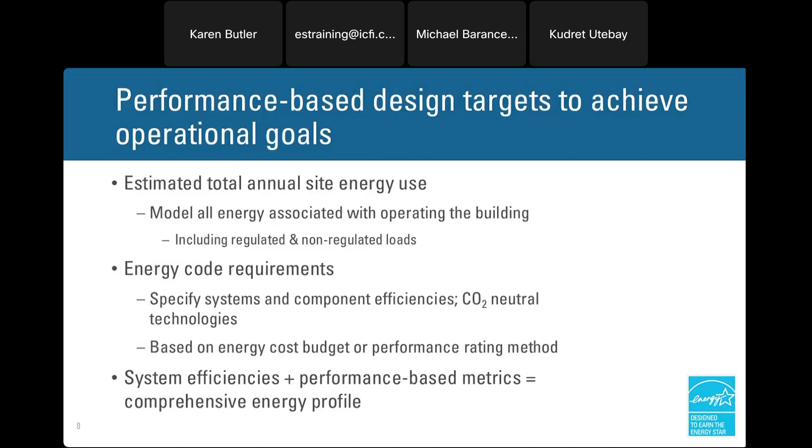So with Energy Star, we look at whole building energy performance relative to the US sample set of peer buildings. Most of you are very familiar with that for existing buildings. Well, guess what? Those same numbers available for existing buildings are also available for you to use as design targets. Then, of course, you have your ASHRAE 90.1 or whatever code compliance system you're using, looking at your system efficiencies, and in some cases performance rating method. However, everything associated with operating the building needs to be considered when running your model so that you can get a whole building energy use target. Next.

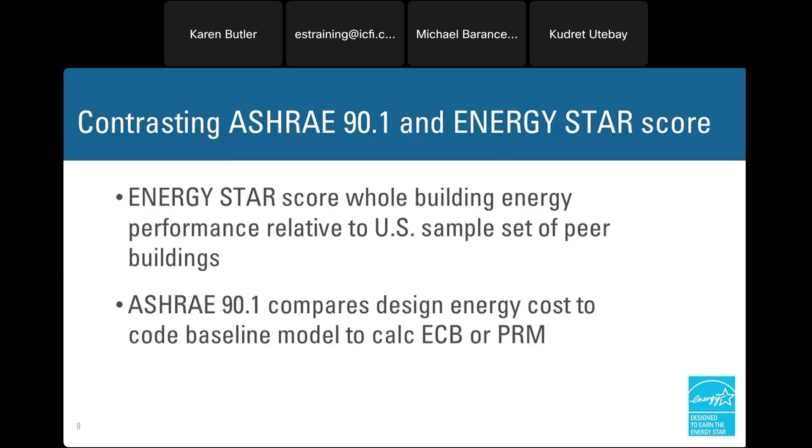And with that said, I get asked all the time, if I do 30% better than code, what is that in terms of Energy Star? Well, it depends. It may be an 80, it may be a 75, it might be 100. It depends on the strategies chosen for the project and the trade-offs you make to get the building to a certain efficiency. That's why having a whole building energy target is helpful, because now you're looking at not only the systems and system efficiency, but also performance metrics. Next.

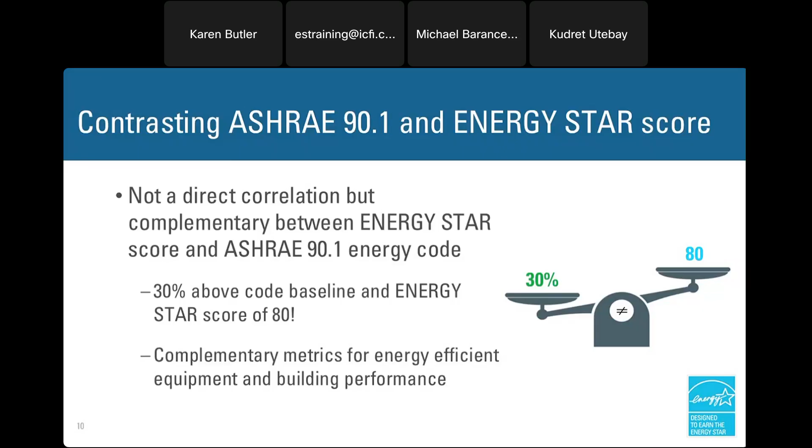Now, next slide. We are going to talk about this a little bit more. I'm going to give you more detail about how we have looked at that with Energy Star. And actually, there's another slide. I should probably have put that next.

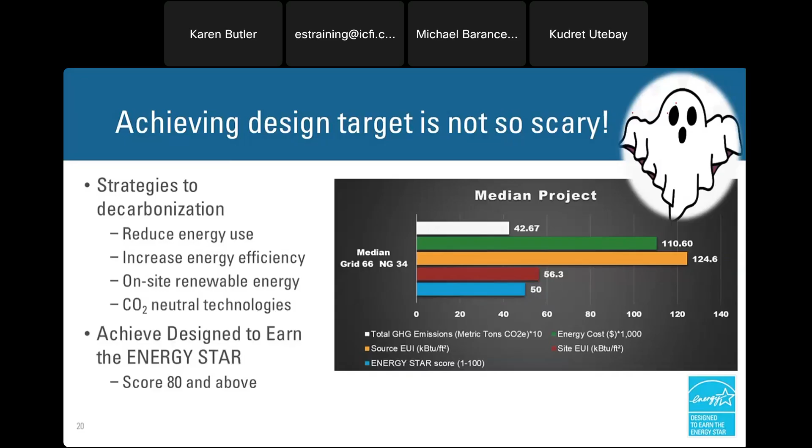So achieving your design target is not so scary. Strategies to decarbonize your projects: reduce energy use, increase efficiency, on-site renewable CO2 neutral technologies, and then achieve Designed to Earn the Energy Star, which is our monicker for design projects that meet the Energy Star criteria, scoring 80 and above.

So this I'm going to go through kind of quickly, and you can read through it when you get your slides. The bottom one is the median project, using median, which is a 50 on the Energy Star score. The second one is a project designed by an A&E firm to meet a certain goal, to achieve one Energy Star score, and two for their client's request. So we're going to look at the one that says grid is 68% and natural gas 32%.

That's my base project. So looking at this project, you can see how you can compare the various trade-offs during design. The lowest EUI is achieved with increased energy efficiency, and then adding on-site renewable energy can help you increase your Energy Star score and decrease your emissions. I encourage you to play around with the tools to take a look at the various strategies you're using.

So this one is 100% grid electricity and 21% energy reduction. In other words, I ramped up the energy efficiency in the building. If you'll notice, a couple things change. The EUI from the grid 68, natural gas 32 was reduced as a result of increasing my efficiency by 21%. The score changed slightly by a point, it went down by a point. And of course this can move around depending on the efficiency of the grid and so on, and where you're getting the electricity from will also have a bearing there.

So the next one I have 83% grid, 17% solar electricity, and I still have my high efficiency. So again, look at the EUIs, they stayed the same, 27.8, but look at the cost, it's reduced as a result of my solar. The emissions are reduced as a result of my solar, and the score is increased as a result of the solar. If you look at the score, which is the blue bar, that's 91, emissions are the white bar, gray and green is the money bar, and then you can see that kind of rust color is your EUI.

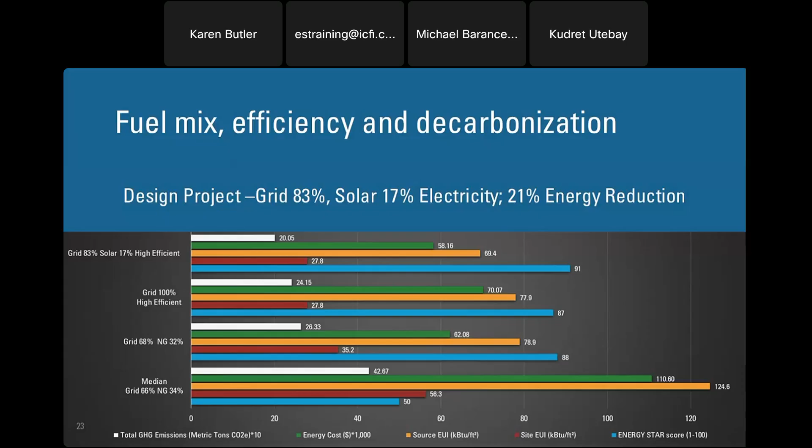Last but not least, this is of course the granddaddy of all: we're going 100% on-site renewable solar energy. And the way it's evaluated in the tool, score is 100. The source and site EUI are now the same, and then look at the emissions and costs, they're both zero. As a result of these renewables, we are now not emitting any more energy into the atmosphere. So these are very powerful numbers and powerful tools if you know how to use them.

So I'm just showing this quickly so you can get a sense of how you can go into Portfolio Manager or Target Finder. You don't have to log into Target Finder, you can just play around a bit.

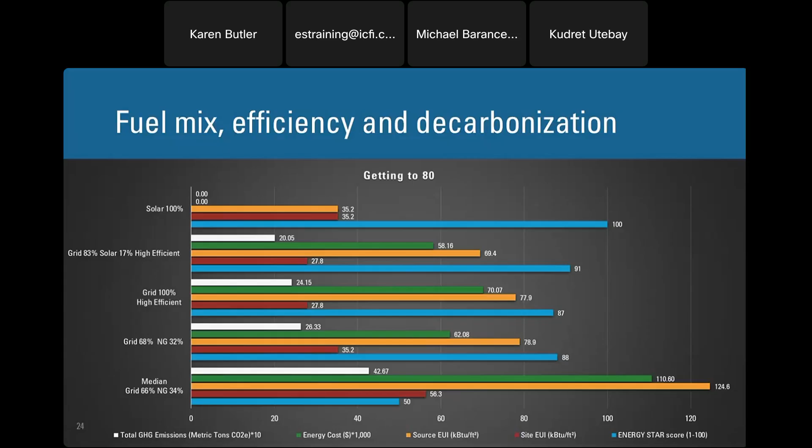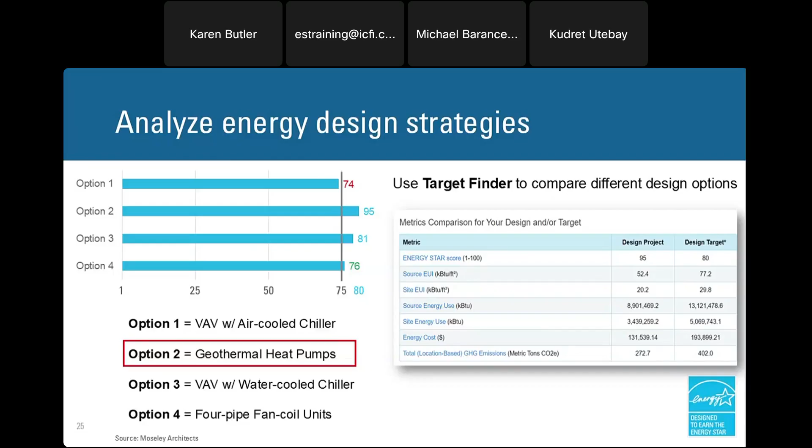And then again, if you have a BPS, for example, this is not perfect yet, and maybe in our new world order of upgrading the tools, we are looking to maybe make it where you can pick your own targets or enter your own target. But for now, if you have to get an Energy Star score, you would enter your information from your predictive model, and it will tell you what your score is for your design project.

And then if you need to get your EUI, the same estimated total annual energy for your project, you enter it in, and there in the box you'll see your site EUI for your design project, your design target, and then also the median.

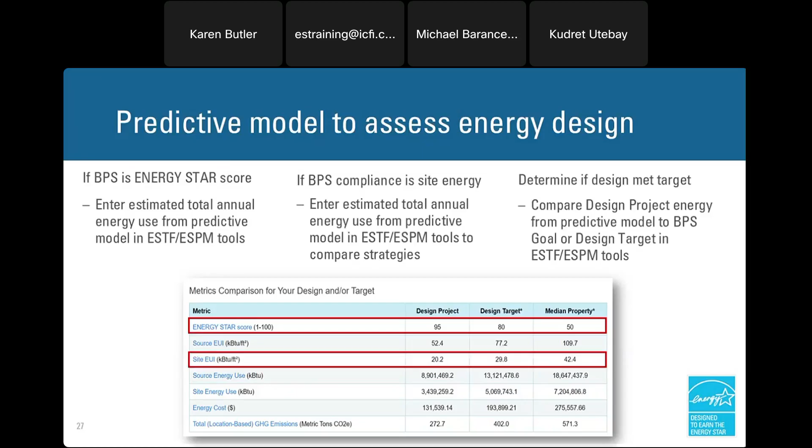The best practices are to set targets early in design, model energy for the anticipated operation of the building, and then use Energy Star metrics to supplement your code and other criteria that you may have.

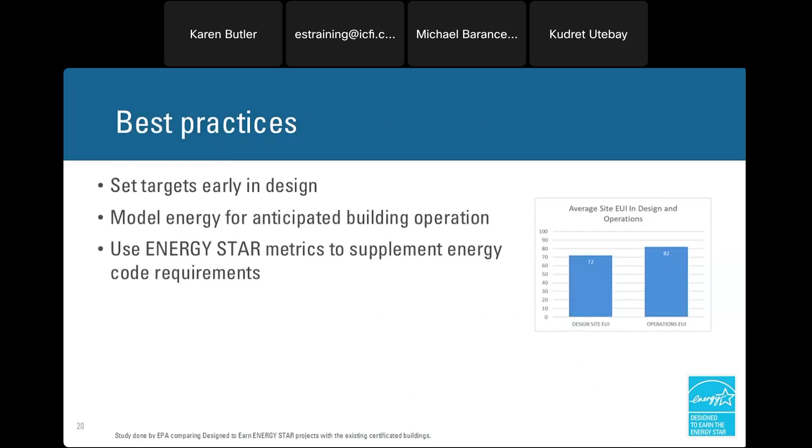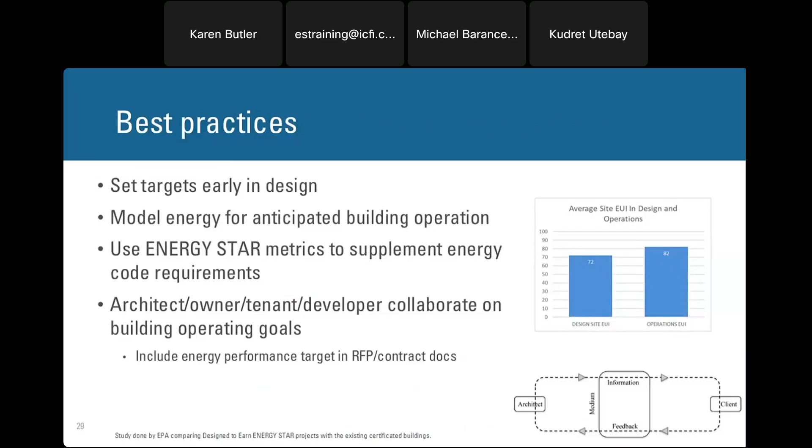Lastly, it's an opportunity for the architects, building owners, and developers to collaborate on their goals. We also have documents to specify your energy design intent, showing you how to incorporate Energy Star metrics within your architectural language for your project contract supplementals.

And then Aim for 80 is our campaign to design for the future.

In August of 2024, EPA increased the requirement for the 1 to 100 score for achieving design to earn the Energy Star recognition to a minimum of 80 for the design's estimated total annual energy on all commercial new construction and major renovation projects.

And I need to say this, and I'm going to say it loud: the score does not apply to existing buildings. It doesn't apply to multifamily, and it does not apply to industrial plants. It's only for commercial new construction projects, because we get that question like, oh my God, you changed it.

To participate in Design to Earn or to submit your project is pretty straightforward. You achieve the 80 score, you verify your energy design intent by the signature of either the PE, the RA, or a professional person. They sign off, and then you submit that documentation to Energy Star or to EPA.

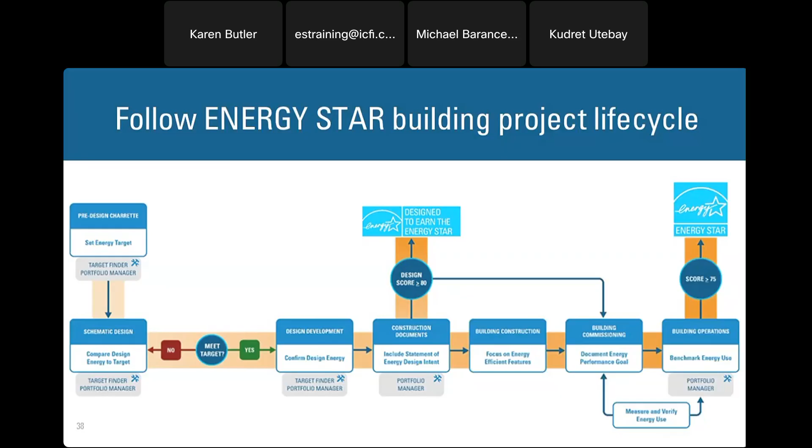And then you take it through the rest of the process through building construction, commissioning, and then, of course, benchmarking. And if it achieves 75 or greater, it gets its star.

Okay, so the tools, real quickly, you're probably familiar with Portfolio Manager and Target Finder, maybe, but I'm going to just run through the tools a little bit, in reference to design. I'm not going to do a training, but just show you what your outputs are from the tools when you're in design mode.

So I'd be curious to hear from you on the ones that were for commercial new construction, since that's what we're focusing on, and where you are. So if you want to hit us up in the chat, let us know. That'll be great. Okay, thank you all for participating.

All right, next slide, we got one more poll for you, and this is an easy one. Have you ever used Energy Star Tools, Target Finder, or Portfolio Manager to establish an EUI or energy use target for your design project? Yes, no, and no but I want to learn more. So take a look at that, and then we'll continue on and come back to talk about it.

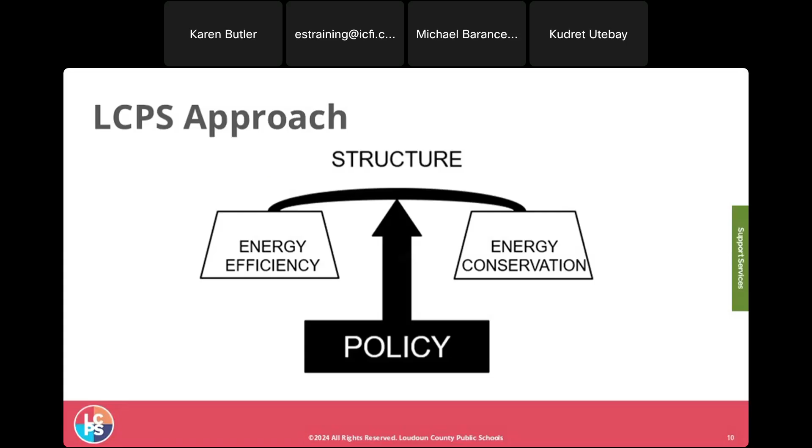And Sophie, I'd love to see the results if it's live when they come in. Looks like we have climbing numbers for 1. Okay, all right, we have experts in efficiency and conservation.

They were unoccupied. One teacher was effectively implementing a conservation action. So this became an opportunity for a conversation with our custodial team about how we could improve a reduction in energy use if we had all the empty room lights being off.

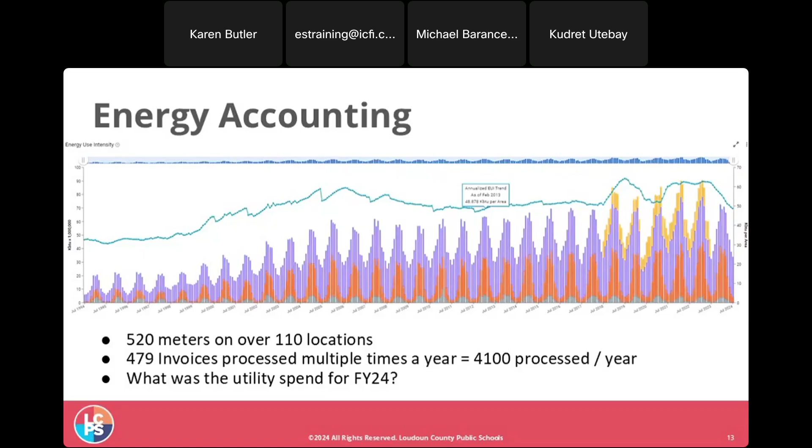We're in occupied mode. Nights, weekends, and holidays, unless somebody has communicated to us via some other systems, in our case, Facility Scheduler Direct, we're going to put that building in setback and assume that it's unoccupied. But there's also some activities during occupied times that we think setback conditions are satisfactory. So we spend a lot of time and effort creating a communications path between the facility users and the building automation systems so that we have occupied conditions where we need them and when, and any other time it's in setback.

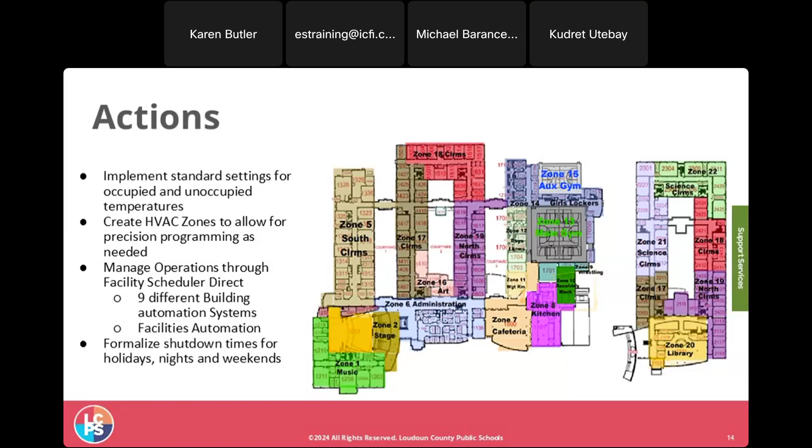And the classic case of that is most of us put our homes in setback when we go away on vacation for a week or so. And if you're not, you should, because it's an easy savings and it's an adjustment of a thermostat. Next slide, please.

So I share this to let you know this is an example of human ingenuity, and it's people who may or may not understand what it is the organization is trying to accomplish. But I'm just saying, don't be dismayed or detracted by people working to bypass your efforts. And I point this out because it's things like this, and this is a very simplified version, and they can get very complicated in some of the complex systems that we work in.

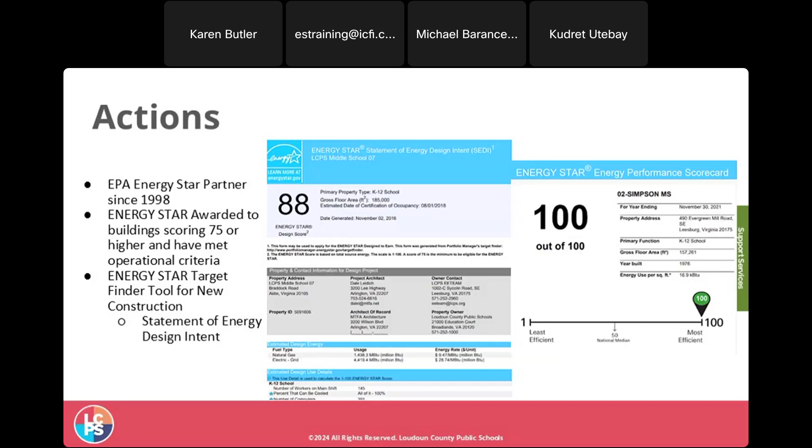I mentioned it at the beginning, and I'll mention it again. Buildings don't use energy, people do. And it's incredibly important to make sure that you're interacting with all the stakeholders that are using that facility, both during, in our case, standard occupied times and unoccupied times. Our schools are like little cities. The principal's a mayor, and oftentimes they're operating from 5 a.m. to midnight, especially our high schools.

So when it's not for education, the community has access to our buildings for Parks and Rec, religious organizations, and scouts and so forth are all able to use our facilities. We couldn't do it without them. That's the bottom line. Next slide, please.

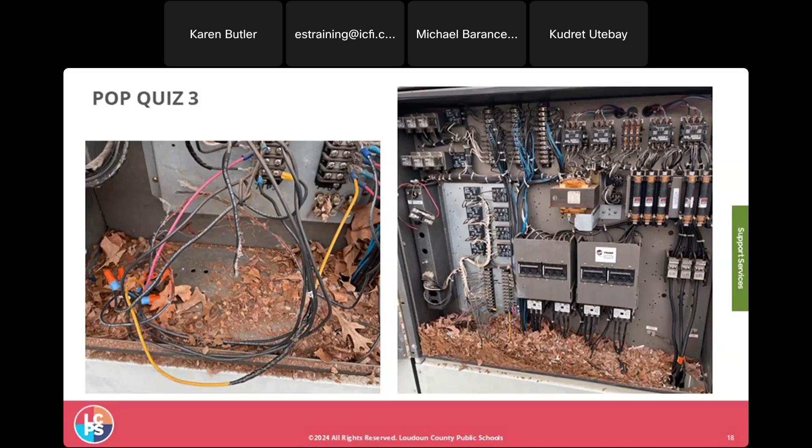And what's interesting about this, we learned that we had to put some attention on this not because somebody said, "Hey, a squirrel built a nest and chewed through the wires that control the HVAC unit." We got a complaint that the energy savings program was causing discomfort in the building. So I put this forth as further encouragement to not let these be a distraction from moving your program forward. It became a great opportunity for education. I think when people saw these pictures, they understood that sometimes things break, and it's not always the energy conservation or efficiency program that's causing their discomfort. Next slide.

Wanted to highlight here that after 30 years of conservation effort, this and the CBECS data raising the bar for Energy Star, our school system realized that we had to move deeper and further into the energy efficiency phase or portion of the pyramid. And in 2019, we activated a contract with CMTA, our ESCO, and we've been moving forward in phase 12 now, and they've helped us maximize our savings, and also, if you go to the next slide,

encouraged us to consider something that wasn't an easy decision to make because of cost and a change to the fundamental design that we had. And so we went with solar and geothermal in the most recent years. Next slide. Here's some data on our solar. If anybody's interested and wants to learn more about our decision-making process for that, you can reach out to me. Next slide.

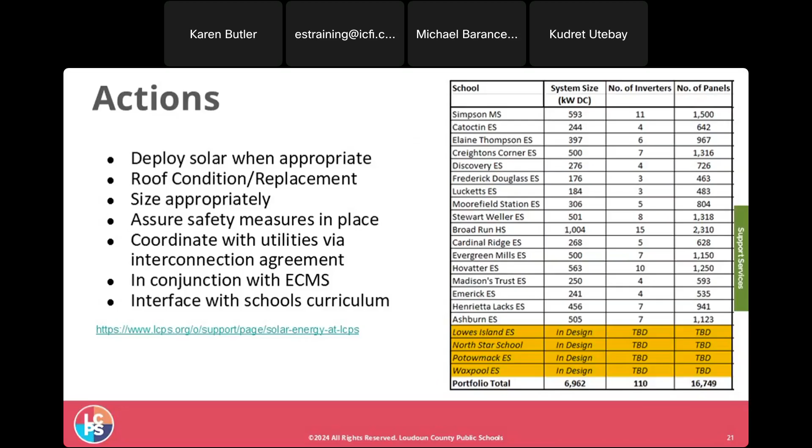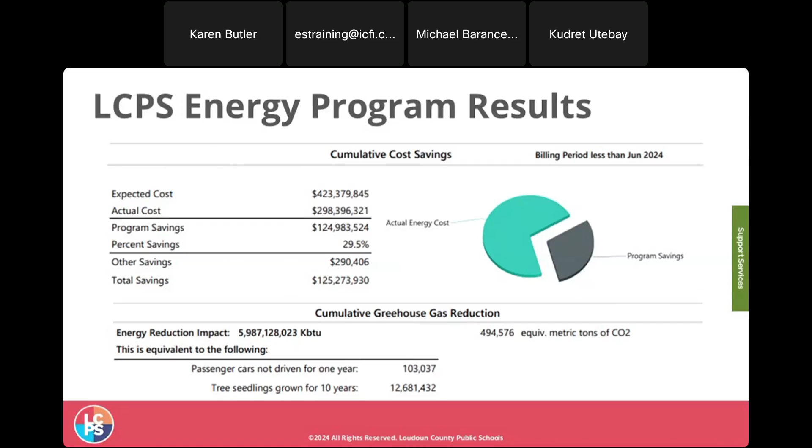What I like about our energy accounting software and Energy Star is the ability to report in both financial and environmental metrics, all fundamental to our sustainability plans. Next slide. If you do all these things, your organization can be recognized. And the final slide, please. So we're ready for our Q&A, Karen and Sophie.